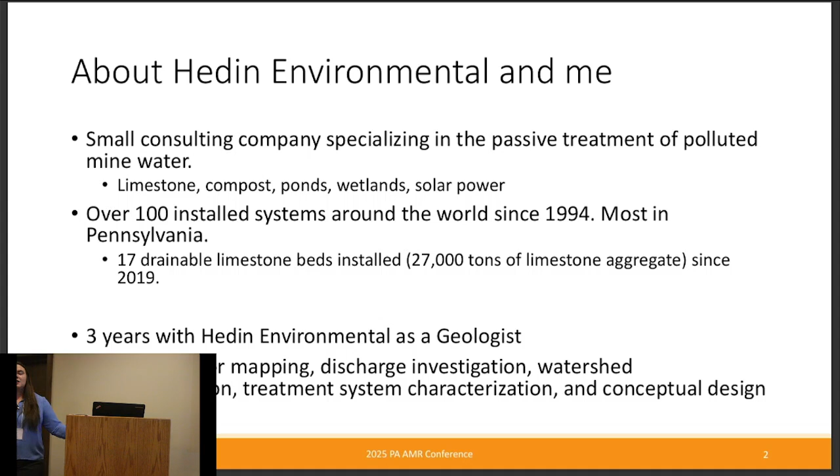But today, I'm going to be looking more at limestone beds and different ways we can characterize their performance, and some methods that we've developed for looking at the effectiveness of maintenance activities, as well as just overall characterizing how well the beds are performing.

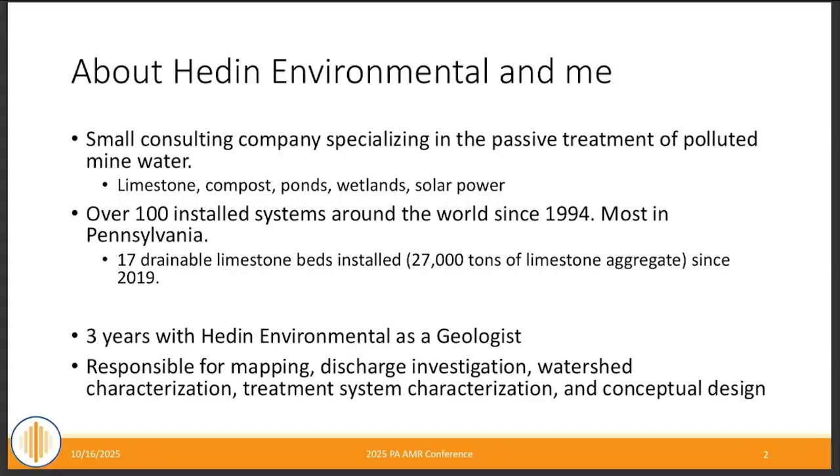So just some background for those that don't know on what is an oxic limestone bed. This is just an open bed of limestone aggregate. As you can see in the pictures, I have 2 examples of 2 different sites. There's no compost on top, it's just open to the atmosphere. And we use it to raise the pH, remove metals, and generate alkalinity.

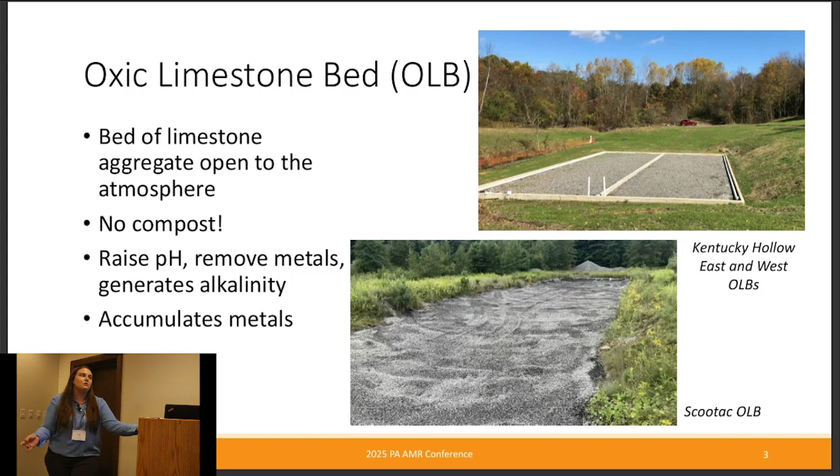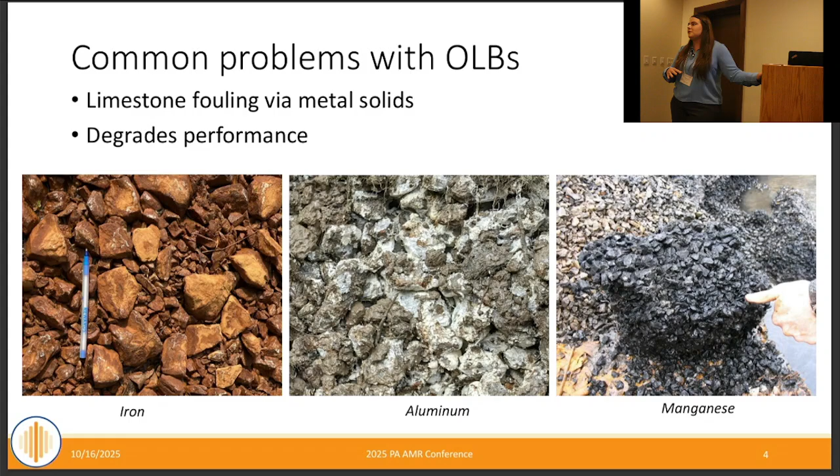And of course, as the bed is removing metals, these metals are deposited in the bed, so the stone will foul and accumulate metals. So that's one of the problems that we have with OLBs. The limestone will foul from these metal solids, and it can be from iron, aluminum, and sometimes manganese solids. As these solids accumulate in the bed, this will degrade the performance. So it will remove less metals, and it will not generate as much alkalinity.

The solids can be in the form of either a scaling on the surface of the stone or a sludge that is on top of the stone. The scaling will prevent the water from interacting with the surface of the stone, and the sludge, as it sits on top of the stone, prevents the water from getting into the pores of the aggregate. So all of this is leading up to the metals accumulating in the stone, so we're eventually going to have to clean the stone.

One way we try to manage these solids is by draining the bed. Usually we do it weekly, or after 1 bed volume, we'll drain the bed empty and let it refill to try to mobilize some of those solids and carry them out of the bed. We can do this either manually with a valve or with an automatic flushing system called a smart drainage system that has a solar panel, and we can schedule it to flush at certain times.

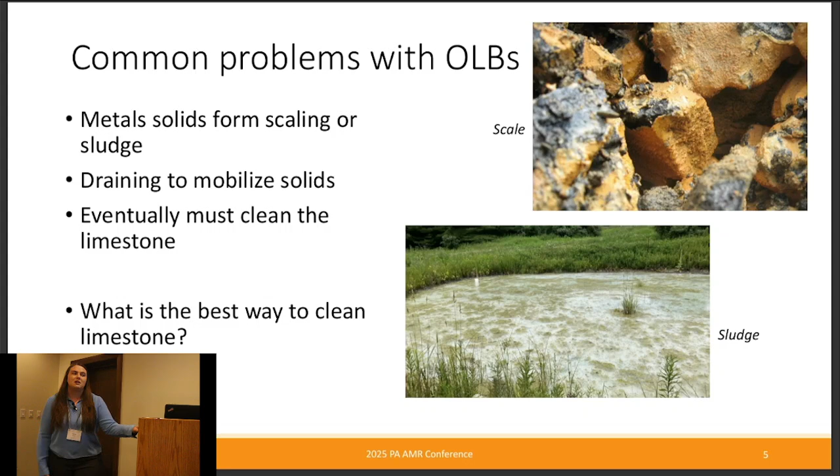But either way, eventually the stone gets to a point where we're going to have to clean it because too many solids have accumulated in it. So we just finished up a project looking at what is the best way to clean the stone. This was with the Western Pennsylvania Conservancy. We were the technical consultants, and we looked at different cleaning techniques and developed a best management practice from this. A lot of the work that I talk through in this presentation is from that project, and some other stuff that we've done after that.

We tested 4 different cleaning methods as a part of this project. The first one being stir and rinse, and you can see, find my mouse. There it is. So you can see up here in this picture, stir and rinse is where we will mix the stone with the excavator, and someone will be spraying water on the stone as it's being mixed. Then the solids will be dislodged from the stone and carried away by the water through the effluent plumbing of the OLB. And then the dozer method, I have a picture of an example down here, the second cleaning method.

So with this, the dozer will push the stone out of the bed through standing water, and you lower the water level as you're doing this. So the stone is rolling in the water as it's being pushed and solids are being dislodged from it. And then eventually the solids that are being dislodged in the water, again, kind of with a stir and rinse, flow out through the effluent plumbing.

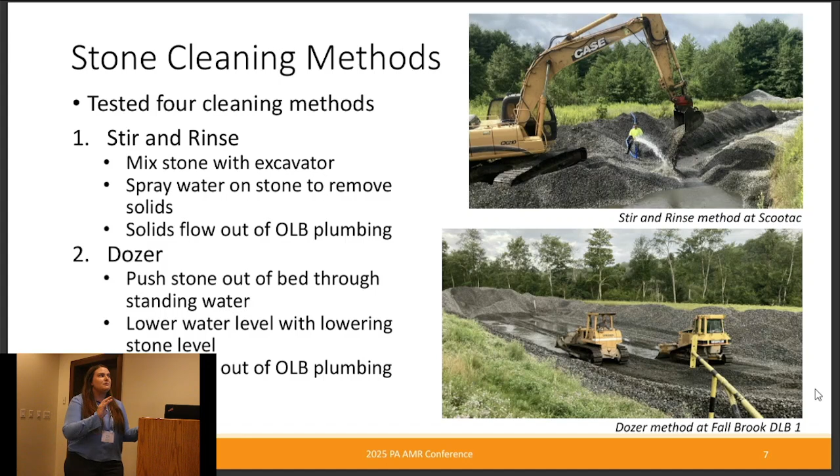But with these two methods, not all of the solids are removed. A lot of the solids are still remaining in the bed. Then a third method we looked at was using a screening bucket. So this is a special attachment that goes on an excavator, and there's two different types, one that rotates parallel to the boom and one perpendicular.

So with this, you scoop stone into the bucket, and as you can see in the picture, you spin the screen as it's in a wash box and put water on it at the same time. So as it's spinning, solids are dislodging from it, the solids are falling into the wash box, and the importance of the wash box is that it's collecting the solids, which are then pumped out of the bed, so no solids that we're washing off the stone are re-entering the bed.

Then the fourth method that we looked at is an even more specialized piece of cleaning equipment. So with this one, you need one or more excavators to do this. So in the bottom right corner there, the stone goes into the top of it here with water, and then the stone is rotated in this metal drum. And as it's rotated, the solids are dislodged from the stone and they fall into a metal pan, which is attached on the bottom here of this.

So the solids are falling into the metal pan with the water and being pumped away, and then the clean stone goes up and is deposited on the opposite end of it. So again, this is really good at capturing those solids so they're not being deposited back into the bed with this cleaning method.

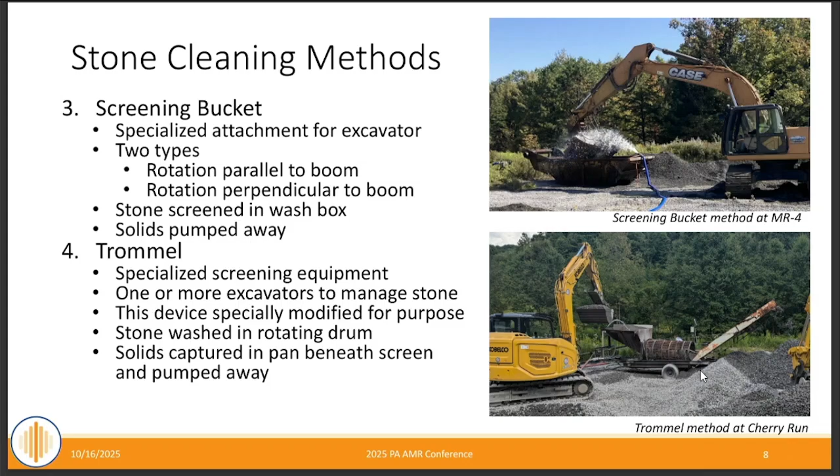Whereas with the screening bucket and the trommel, while they're more expensive and their throughput is relatively lower, all of the solids are removed from the OLB, which is much better management, so those aren't going back into the bed, and we're able to maximize the amount of space for treatment with stone that can treat the water. But overall, the main difference between these methods was where are the solids going.

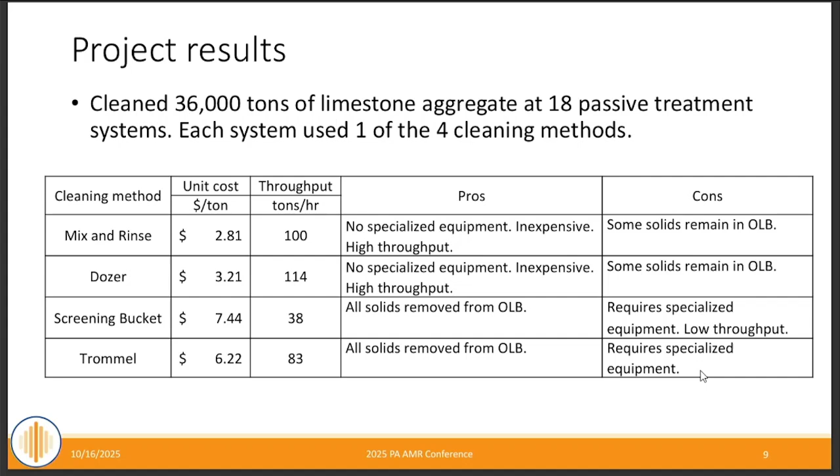And so then we were trying to look at how we can compare these methods to see which is better as far as cleaning interval. But based on the timeline of the project, we can't be waiting 5 to 8 years for the stone to foul again. So we were trying to figure out another way to evaluate the effectiveness of the cleaning besides waiting for how long it took the stone to refoul. And with this, we developed several methods of characterizing the beds before and after cleaning. And that's mainly what I'm going to be talking about.

So two simpler methods, which I'm sure most of you are familiar with, we would just gather water quality data going into and out of the bed before and after cleaning, and that included usually iron, aluminum, manganese, and general AMD chemistry. And we also would measure field alkalinity and do alkalinity tests.

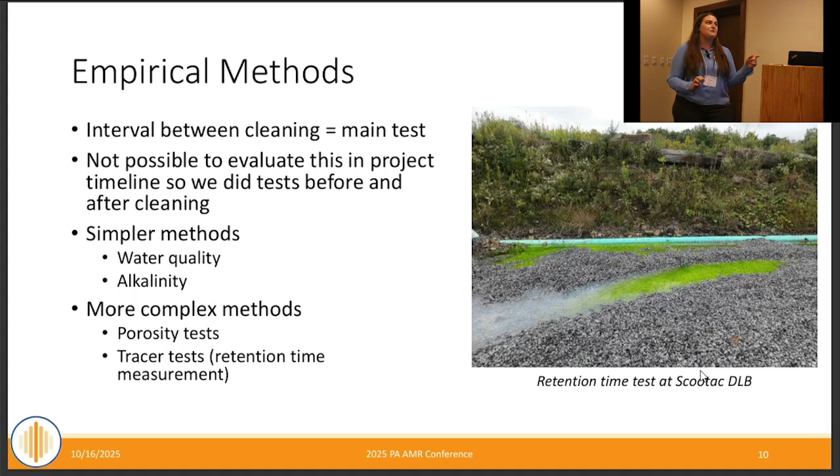And then getting into some more complex evaluation methods, we would do porosity tests and tracer tests. So I'm going to go through each of these, and specifically I'm going to focus on porosity and tracer tests. But first, briefly, water quality.

So like I said, the goal with the oxic limestone beds is to have them generate alkalinity and also remove metals. So the question we've been trying to answer is: is the bed removing metals? And then, as far as pre and post cleaning, are we improving the amount of metals that the bed is removing?

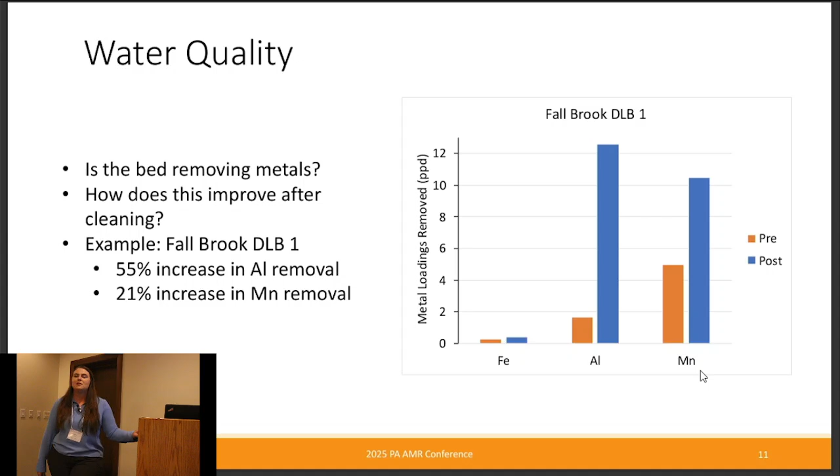Here's a brief example from a site called Fall Brook. On the y-axis I have metal loadings removed in pounds per day. Pre-cleaning is shown in orangey red, and post-cleaning is in blue. You can see quite an increase in metal removal post-cleaning: aluminum removal increased 55% and manganese increased 21%. That's what we want to see after cleaning these beds, an improvement in performance, which was the case at this particular site.

So then for alkalinity, we'd measure alkalinity leaving the bed before and after cleaning to see if it's improving, to see if we're generating more alkalinity after cleaning these beds.

We then compare these Alkast values, the maximum alkalinity it could produce, to what the bed is actually producing, to see if we can improve alkalinity generation. This graph shows different sites we tested for the limestone cleaning test, with the y-axis showing the percent of Alkast value achieved, which is just the alkalinity we measured divided by the Alkast value we got.

I have before and after cleaning values here, with before cleaning in orange and after cleaning in blue. You can see that for most sites, we had an increase in alkalinity generation post-cleaning. For pre-cleaning, the average value sites were achieving was 43% of the Alkast, and post-cleaning that increased to 77%. That was good to see, that the cleaning is actually helping improve alkalinity generation in these OLBs.

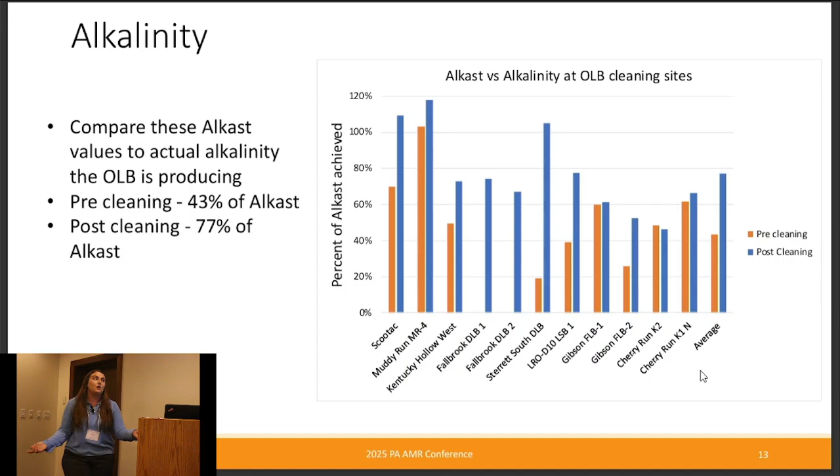This leads to more complex methods of assessing the effectiveness of cleaning, one of which is porosity. Generally, when thinking about porosity in OLBs, most people assume it's around 45%, but as we did these tests, we found the actual porosity was often much less than that.

As OLBs remove metals, scaling and sludge accumulate, which decreases the porosity in the bed. So what we'd do is measure the porosity before and after cleaning to see if cleaning is improving this. We do this by emptying the bed and then measuring the water level.

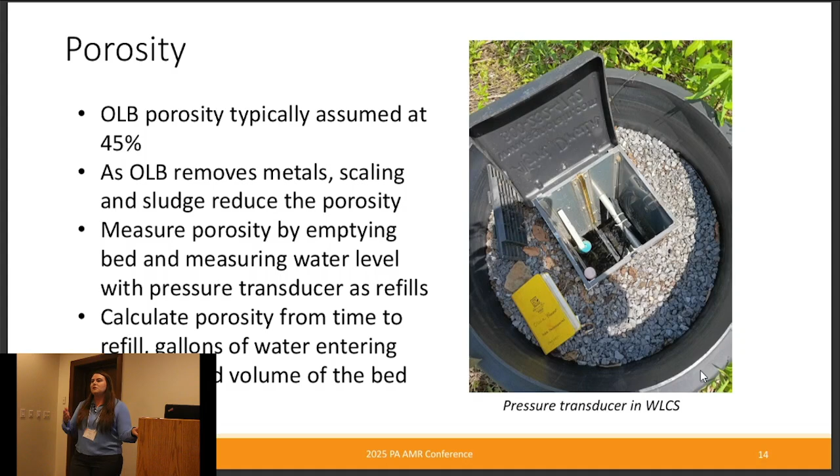Here's an example setup with a water level control structure. I'd install a probe to measure the water as it's refilling, and take the time it took to refill from the water level. We'd get flows before and after, so I know how much water is coming into the bed. Using the total volume of water coming in and the volume of the bed from as-built drawings, we calculate the volume being filled relative to the total volume, to get the porosity of the bed.

Here's an example of a test we did at Sterrett DLB. Water elevation is on the x-axis and porosity is on the y-axis. As we do these tests, we can get into more detail by looking at the porosity at various depths within the bed. If we look at the porosity of the bed as a whole, it was 30%, but when you break it down by different water elevations, you get a more detailed look at the porosity.

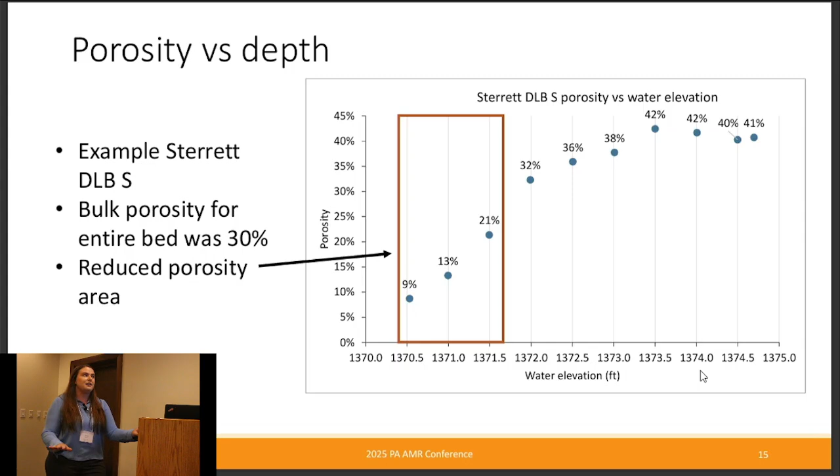In the case of Sterrett, the bottom foot and a half of the bed had significantly reduced porosity, ranging from 9 to 21%, whereas the rest of the bed was closer to the average of 30 to 45%. This was something we commonly saw in quite a few beds when we drained them down far enough to look at the bottom part. We're assuming this could be from years of maintenance and solid settling. Most of these weren't newer sites; they had been in use for a while, so if you aren't removing solids from the bed, they eventually settle to the bottom, and we think that's causing the reduced porosity in the bottom portion.

Here is an example from porosity tests I did before and after cleaning, at the Kentucky Hollow site in Allegheny County. Pre-cleaning, we did two tests, shown in blue and red diamonds, with porosity hanging around 35 to 36% and alkalinity production of 110 milligrams per liter. Post-cleaning, a few weeks to a month after we cleaned the bed, we retested the porosity and it increased to 45%, with alkalinity generation increasing as well. The goal was to see if cleaning actually improves the porosity of the bed, and in this case it did, along with improved alkalinity generation.

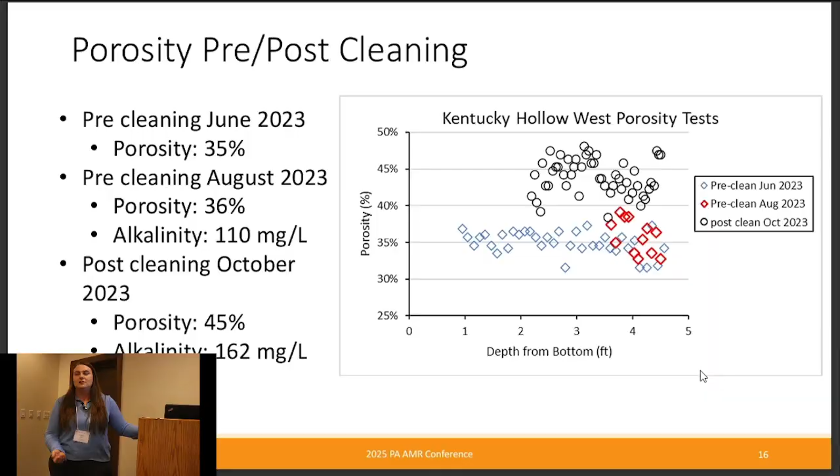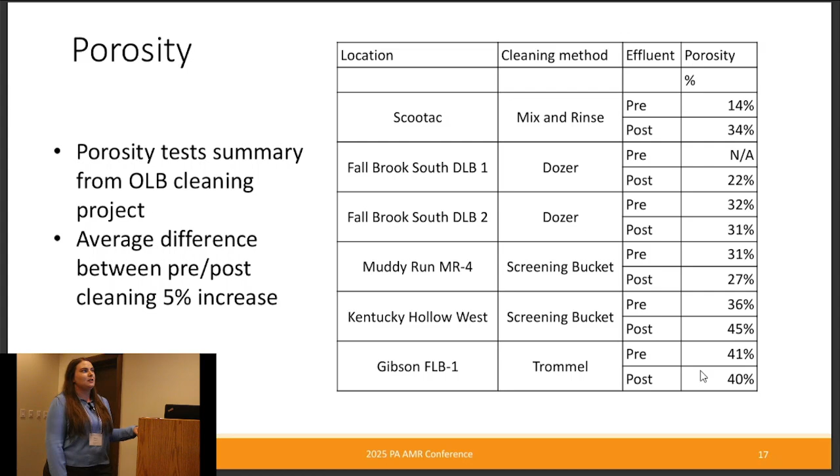This is a summary showing the sites where we tested porosity for the OLB cleaning project. On average, there was only a slight increase, about 5%, from before to after cleaning. There are a lot of other factors in play with cleaning besides just improving porosity, which is why some sites don't show much difference. But for other sites, there was a pretty significant difference—like the first one, Scootac, where we saw quite a big increase in porosity. So it just depended on the site.

That leads us to the fourth evaluation method we used to look at these OLBs during the cleaning project: tracer tests, which are what I love to do. I love injecting fun fluorescent dye into these beds. We do these to measure the hydraulic retention time in the bed, using sodium fluorescein dye, also known as fluorescein or uranine—though you don't want to look it up in the literature, there's a lot of arguments about the naming of it.

I used a logger probe, installing it in the effluent box, usually of the system, to measure the dye concentration. We use fluorescein dye because it's non-toxic, so we don't have to worry about environmental or health and safety factors. It also photodegrades, with a really short half-life in sunlight, so you don't have to worry about it hanging around for a long time—it quickly photodegrades and is gone.

As far as calibration of the sensor, we changed our method as we learned more and did research. Initially, I calibrated the probe using a standard solution bought from the lab, but we realized a better method might be to use the actual mine water I'm injecting the dye into, along with the stock dye used for the test itself. This eliminates a few sources of error—the dye could interact with chemicals, metals, or turbidity in the mine water, affecting the fluorescence the probe captures, so using the mine water itself equalizes that. Also, there's a slight possibility the reported concentration of my stock dye differs from the actual concentration, so maintaining the same dye across calibration and injection removes another possible source of error. Generally, I'd use the mine water I was injecting into for calibration, making my own calibration solution with the dye I was going to inject.

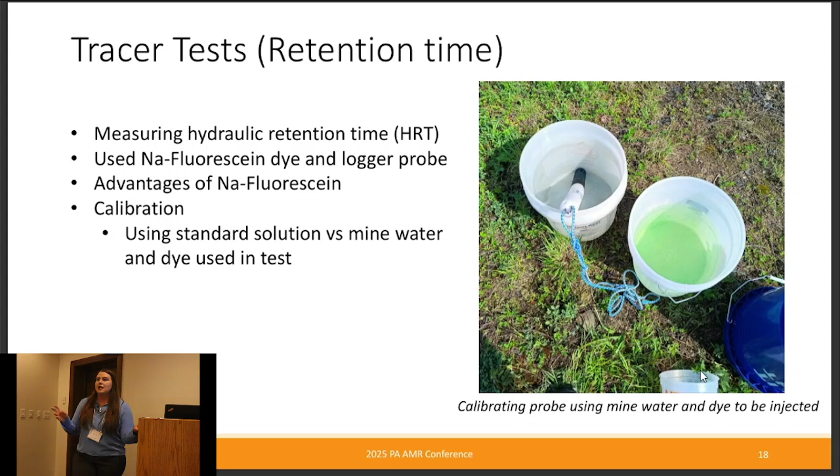There's a lot of different methods if you do research on how to determine how much dye to inject into the beds. There are very complicated equations involving velocity, flow, and length, but we've simplified it to focus on what our goal is, especially with these DLBs.

We decided to look at the pore volume in the bed, and calculated how much dye we would need to inject in order to get a 10 ppb concentration of dye in the pore volume of the bed. That determined how much dye we would actually inject.

Because we were doing tests at different sites, and also multiple tests at the same site, we wanted to find a way to normalize the data to compare it across these different sites and tests. We did this by calculating a theoretical retention time, taking the pore volume divided by the flow rate.

So how long should the water actually be in the bed, just based on these factors. We also normalized the dye recovery, looking at the effective dye recovery to account for any dye that we're losing.

Because I'm injecting a known amount of dye, like pictured here, say 20 milliliters, and then measuring how much is leaving the bed, I should be able to account for all the dye I've injected, and my dye recovery should be 100%.

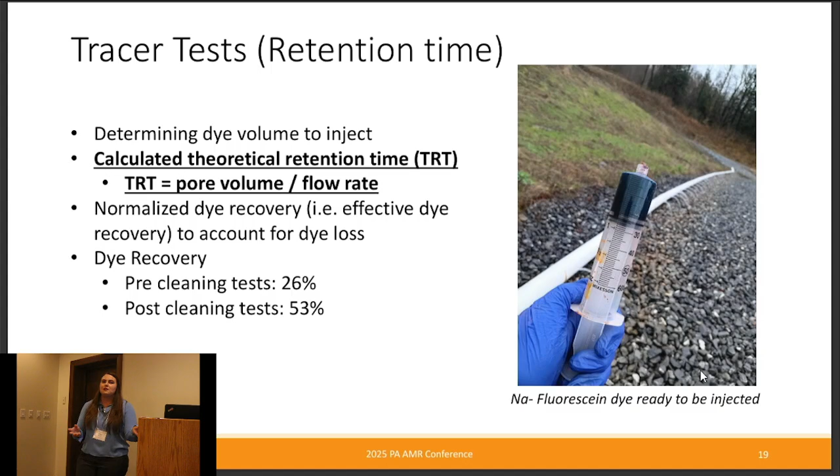But to look at this more, I did some bucket tests to try to figure out if AMD solids could be affecting the dye recovery that we're having in these beds.

For the bucket test, I had a control, which was just clean mine water with 10 ppb concentration of dye added, and I let that sit for a half hour. On the graph I have time on the x-axis and dye concentration on the y-axis, and the dashed line marks that half hour when I changed the control.

After a half hour, I would either add clean limestone, or fouled limestone that I got from a mine site, which had aluminum and some manganese solids mixed in with it. I added the clean limestone, then the fouled limestone, to see what effect that had on the dye concentration.

The clean limestone is the blue line, and after the dashed black line, so after I added it to the control, there was really no change in the dye concentration.

Versus when I added the fouled limestone to my control, there was quite a decrease in the dye concentration. It dropped from the control, which was hanging around 10 to 10 and a half, down to about 7 and 6, even as low as 5, and continued to decrease until it plateaued a bit.

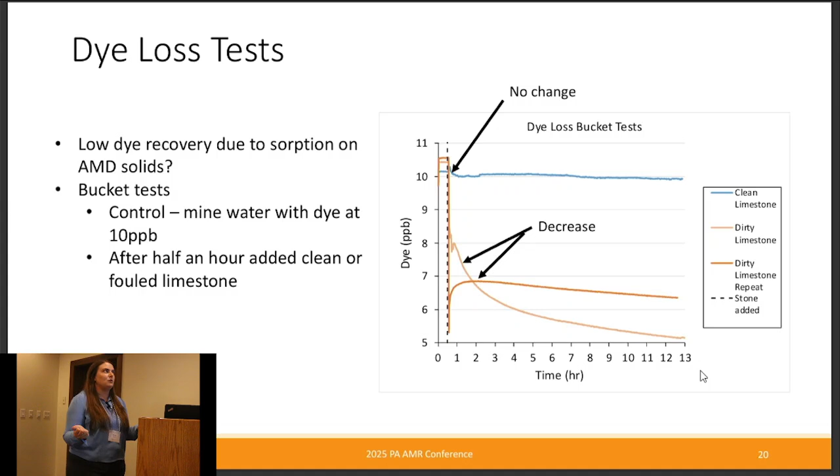So as we were looking at these, we get to the fun part of interpreting the data. We would look at the peak in the dye recovery, which is the dominant flow path. That is the solid black line showing the peak of the dye, representing the percent of the maximum dye concentration.

We also would look at the 50% effective dye recovery, represented by the dashed line. The 50% is the mean flow path, whereas the peak is generally the dominant flow path. We compare these two values to the theoretical to get the actual retention time versus how much retention time we were expecting the bed to have. Generally, our goal is to have a longer retention time to give the water more time to interact with the stone to generate alkalinity and remove metals.

So I'm going to go through a few examples of these that we did.

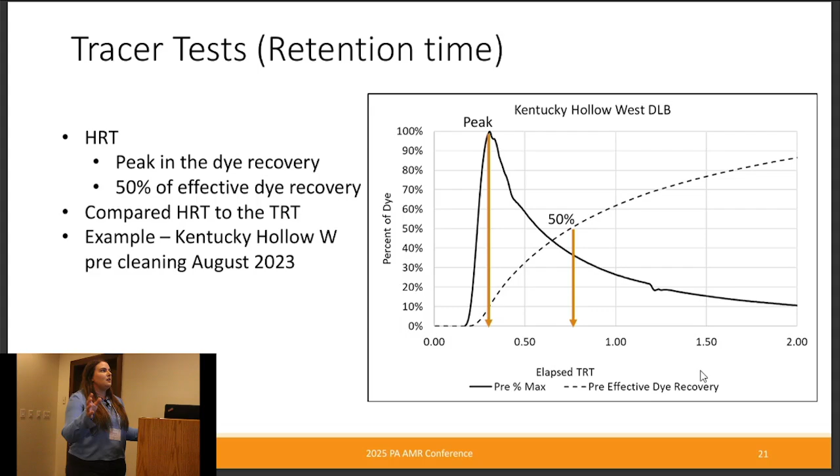For the limestone cleaning test, we had a tracer test that we did before and after the cleaning. This is an example of the MR4 site. The pre-cleaning is in orange and post-cleaning is in blue. I've listed the theoretical retention times and then the peak and the 50%. For the pre-cleaning, the peak was at about 25% of theoretical, and the post-cleaning peak was hanging closer to 100% of the theoretical retention time. So we definitely saw an increase in retention time compared to the theoretical post-cleaning, which was what we were looking for. After we cleaned, we wanted to see an improvement in the retention time.

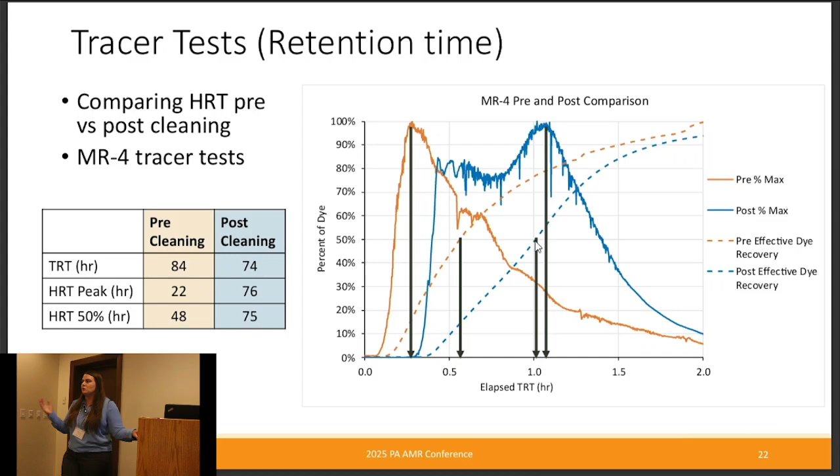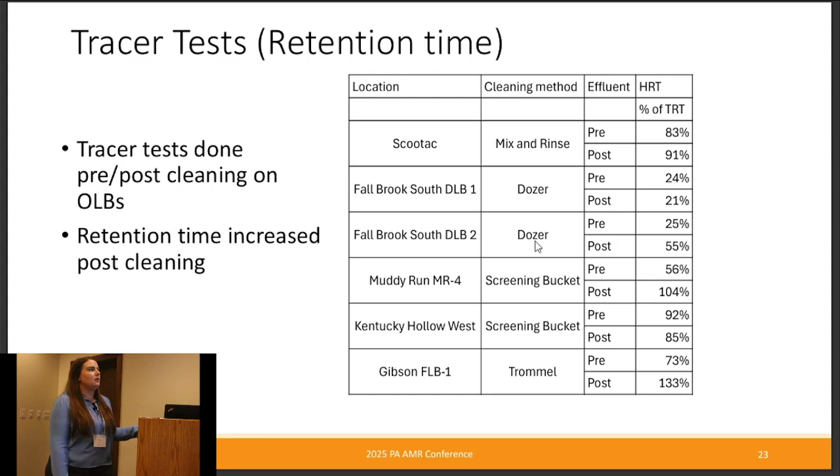And for most of our sites, that's what we saw. This is summarizing the percent of theoretical retention time for the tracer tests we did for the limestone cleaning project, pre and post cleaning. For a majority of the sites, the retention time increased, which was what we were looking for as far as the cleaning went.

With these tracer tests, one thing we could use them for, like I was discussing with the limestone cleaning project, is to look at the effectiveness of the cleaning and see if there's any improvement in retention time. But they also can help us diagnose systems that might not be performing as well as we'd want, or we can even compare different OLB designs to each other, especially with normalizing the data. That allows us to take tests from different sites and compare them to each other and see what the differences could be.

So I'm going to go through a few different designs that are comparing the retention times to each other to see the difference between that.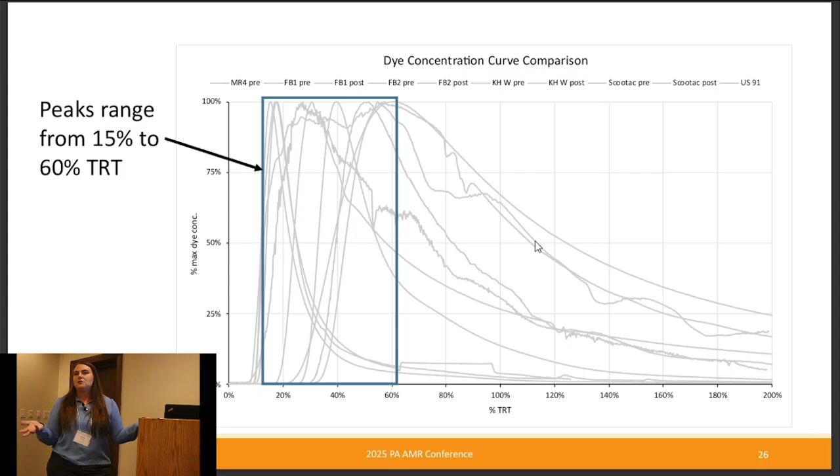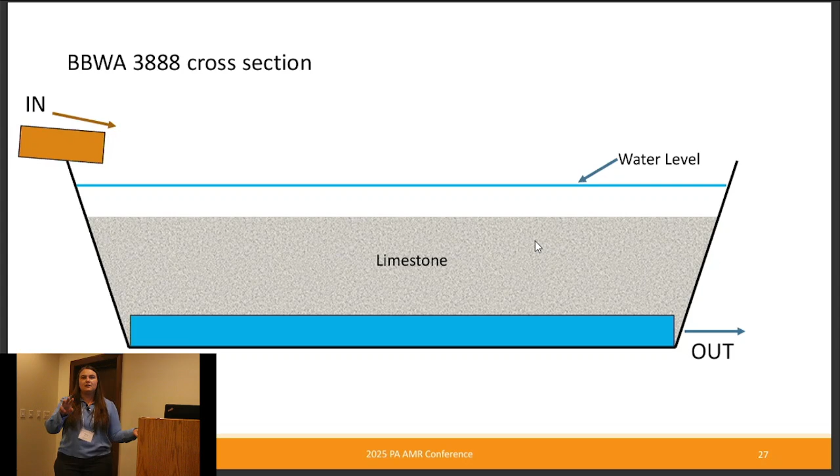If we then look at a different design, this site is called BBWA 3888, up in Elk County. We're working on a redesign for this site, but we wanted to look at what retention time the site has in the way it's currently designed. With this, the influent is just a single pipe coming into the bed, and there's a 1-foot water cap on top of the stone, and the effluent plumbing is 3 perforated pipes running the length of the bed, giving us vertical flow out of the bed.

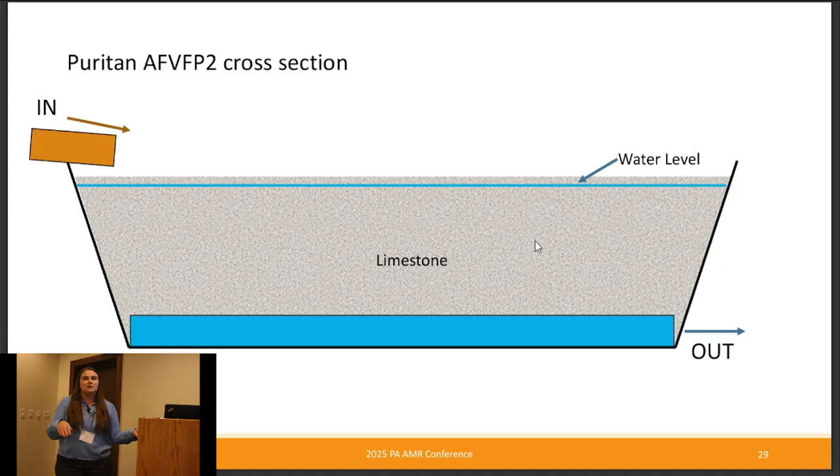So another site that we did a tracer test on to compare the designs is Puritan, an overflow bed. The setup of this bed is it has a single pipe in, similar to BBWA, but there's no water cap. So the water level is below the stone, but it does have vertical flow out. It's a single perforated pipe running the length of the bed.

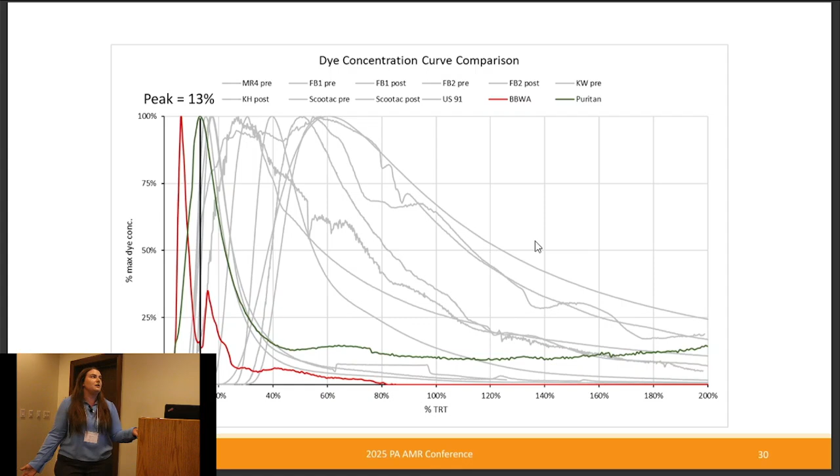And the results from that are shown in the darker kind of green color. The peak from that test was 13% of the theoretical. So again, a little bit higher than BBWA, but significantly reduced from what we would expect based on the theoretical.

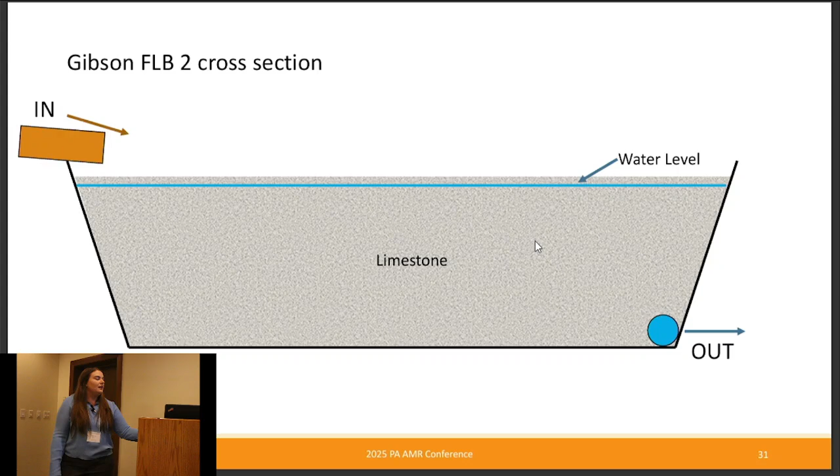For comparison, it's really interesting when we're doing these tests that you're really able to compare a wide variety of different sites and different designs directly to each other to see what effect the plumbing can have on the retention time. So we're seeing with these sites where the retention time is much shorter, possibly there might be short-circuiting issues with the vertical flow, or there could be preferential flow paths causing the retention time to be significantly shorter than, in theory, we would expect. The tracer test is a good, relatively simple way to get at that and give us actual data for what the retention time is.

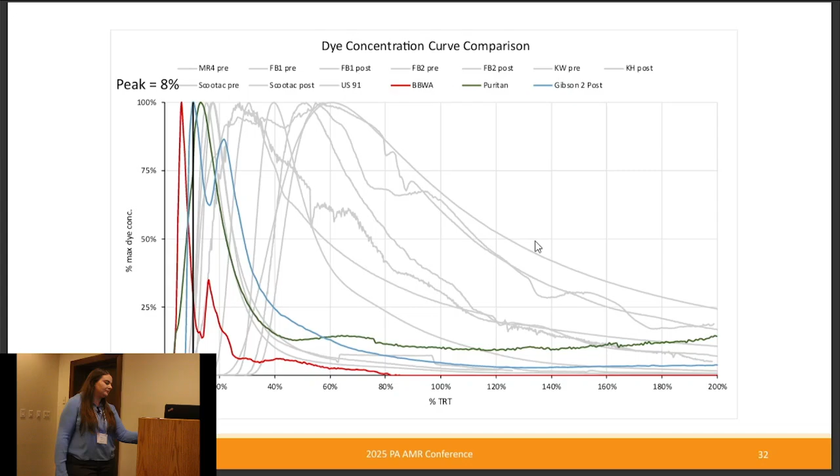Generally, I went through a lot of different methods here, but for this limestone cleaning project, we looked at the water quality and the alkalinity before and after cleaning to give us a good idea of how many metals the bed is removing, whether alkalinity generation is increasing, and generally we saw that metal removal was increased after the cleaning and alkalinity usually was increasing as well. Those are good, pretty simple comparisons to get an idea of how well the OLBs are performing and whether cleaning the bed is improving its performance.

Then looking at more complex methods of evaluating these limestone beds, we get to porosity tests. They can give us an idea of areas of reduced porosity. Like I said, a lot of the tests that we did had reduced porosity in the bottom foot and a half of the bed. And with tracer tests, there's a lot of different data we can interpret from this, and we can define the effectiveness of cleaning and maintenance, like we did with the limestone cleaning test, by doing these tests before and after cleaning to see if we're improving the retention time the way we wanted to.

Or we can look at different plumbing and short-circuiting issues. Like with some of the different designs that we tested, we can see whether the retention time is lower because of this. There are a lot of different factors at play, but that could be one of them. The tracer test helps give us some insight into this and helps us compare OLB designs directly to each other by normalizing the data from these tracer tests. All of them are useful tools that really helped us in our project, but more in trying to figure out whether there's a better way to design these systems to achieve the desired results and help us see what is impacting the effectiveness of the treatment from the OLBs.

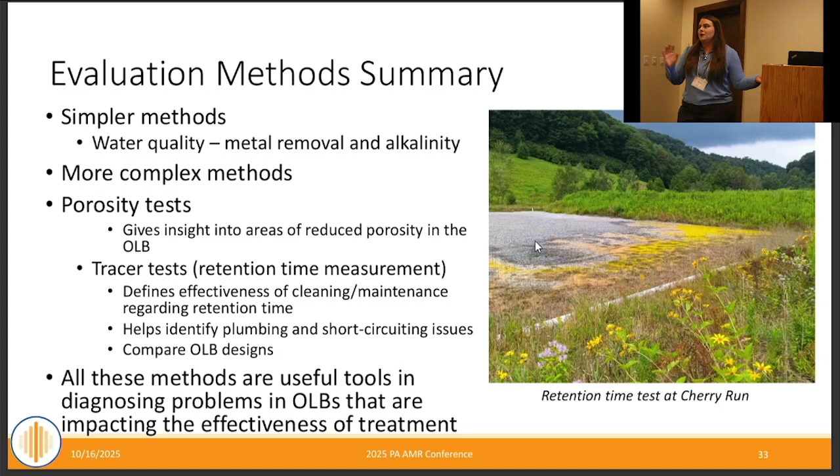If cleaning the stone becomes a maintenance option, based on the fact that you've done so many different systems, is it something where you'd say, okay, you should do this every 4 years no matter what, or do you just do it when it starts to clog? Or did you see any benefit by doing it more often, or is it just, it's dirty and then it's clean, so it doesn't necessarily matter when you do it?

Do the cleaning activity or do these tests? The cleaning activity. So are you saying in general, or from what you've seen, it would be really good if you did this every 5 years to get the most benefit out of cleaning that stone? And I know in a lot of these cases they're often forgotten or there's not a lot of maintenance, so it's usually done when something's not working. But if you consider it part of the maintenance, or you can make recommendations to a group, have you discussed that at all or thought about what that might look like?

I kind of got an answer, Olivia? Well, yeah, from my perspective, I feel like you have to keep on top of the systems. And I know a lot of times some of the groups don't have the resources to do that, but once you see that it isn't performing as well as you'd want, or there's a decline in metal removal or alkalinity, then the discussion needs to begin, not when the bed has actually failed. But I'm sure Neil has some input on that.